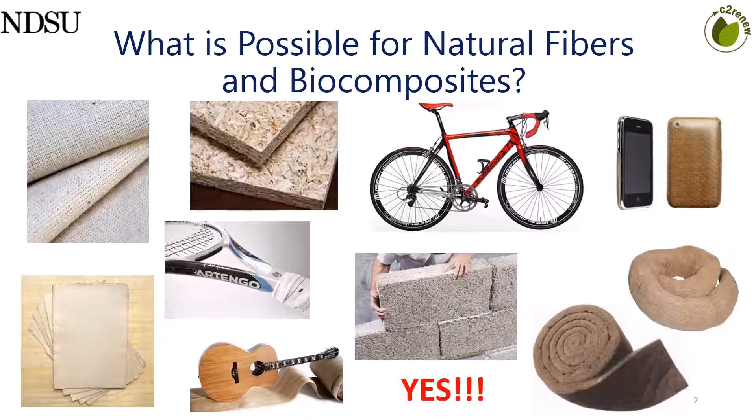Similarly, people ask me all the time, what type of plastics can we make from these materials? And there's a wide variety of different plastics that can be made, either forming epoxy or acrylic type thermosetting resins from the vegetable oils. You can break down the cellulose into simple sugars and build them back up as, say, cellulose acetate type thermoplastics or polylactic acid type thermoplastics. There's a wide variety of ways you can utilize this plant. And so my answer is always yes. There's a ton of different plastics that can be made from these materials.

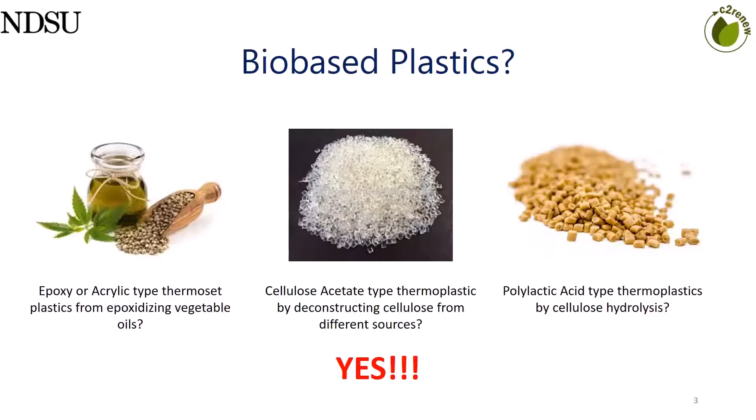But at the end of the day, we have to decide what is truly sustainable, what is going to have relatively low environmental impact, what is going to be beneficial economically, what is going to be beneficial to the people handling these materials in these processing and manufacturing facilities. Only when you start to assess all of those aspects are we going to be able to determine what is sustainable and what is not moving forward.

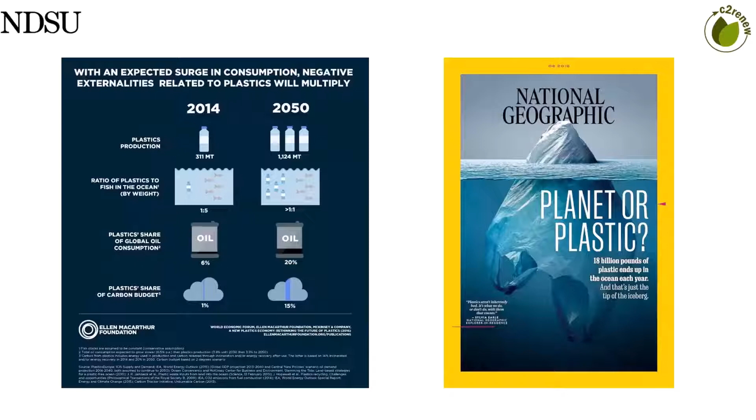And I'm sure you're all very familiar with concerns about the amount of plastic that has entered our waterways. There was an Ellen MacArthur Foundation study done a few years ago to predict what volume of plastic might be in the ocean in coming years. Also, we've seen estimates of running out of landfill space.

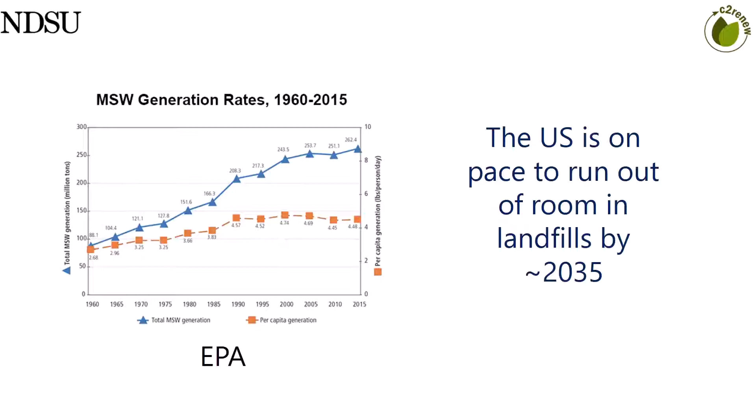Estimates are the U.S. will be on pace to run out of room in landfills by 2035, which is not too far off in the horizon. And so when we look at how to develop materials and what is truly sustainable, our group really focuses on the three capitals: natural capital, what our planet offers us; manufactured and financial capital, the prosperity; and human and social capital, our people. And one thought is where these three intersect is where you can truly find some sustainable materials, sustainable technology,

something that can have very low impact on the environment, yet be financially sound and make money and sustain people in terms of their work-life balance, in their prosperity and their development as humans. That intersection is where we find sustainable material development.

And we do a lot of the analysis of any material that we develop. We look at both the LCA, life cycle assessment, as well as the techno-economic analysis to help determine, are we meeting this sustainability target right in the middle there, or are we off base? And so these are some of the tools that we've been utilizing with colleagues to try and determine when we're developing new materials if we're meeting this mark.

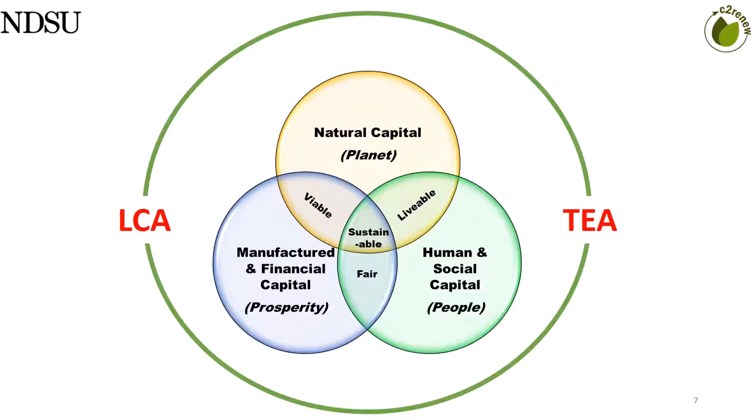So our research approach at North Dakota State University over the past decade really has been focused on working as a land-grant university, working with our agronomists, our plant breeders, and looking at what's available out in the fields. What can we break down into, say, proteins or starches, stripping the natural fibers from the bark of a stalk, utilizing the woody core. Are there alternative uses for the vegetable oil that one can convert into different plastics and use to manufacture a wide variety of composites that ultimately will hopefully end up in commercial applications, whether it's farm equipment, automotive, consumer-facing products, the list goes on and on.

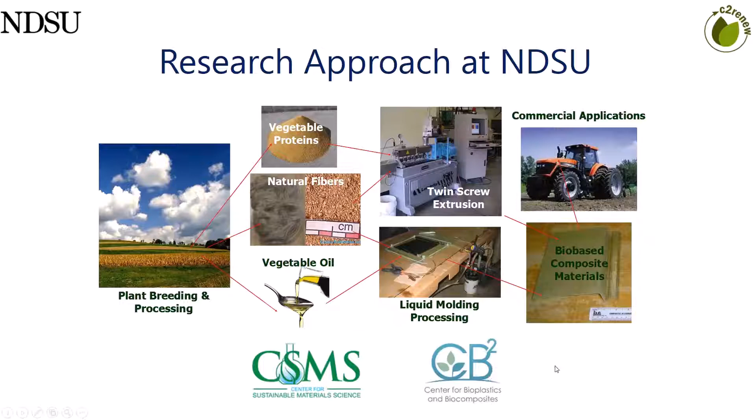And for several years, we had our Sustainable Materials Science Center that was funded through NSF EPSCoR for 6 years. And we're just coming off of that. And really now, since we've been able to develop several different materials utilizing this approach, we're starting to look at how we can then implement those through industrial applications by working through CB2, which this webinar is part of.

I kind of break the development of different biocomposite materials down into 3 project areas that I've been involved with over the years. Short natural fiber, and this can be thought of as mainly fillers in different types of plastics, from say hemp, flax, sunflower hull, oat hull. We've analyzed and assessed many different types of these agricultural byproducts as fillers or short fiber reinforcement.

Then there's the category of long natural fiber, where you start to utilize fibers with aspect ratios of greater than 2,000, that length to diameter. And this would be also your flax, but the fiber comes from the outer bark of your stalk. Similarly with hemp, and as I mentioned earlier, kenaf and jute are other examples of bast fibers. But there are also long fibers available in certain grasses, giant miscanthus, bluestem from around here, that one can utilize as reinforcements.

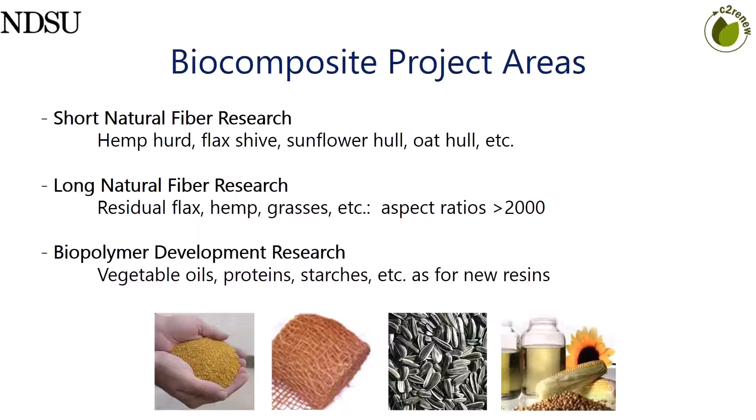And then I work very closely with colleagues on biopolymer development, from both NDSU as well as some of the other participating universities in CB2, such as Iowa State, University of Georgia, where they're developing polymers from vegetable oils, proteins, starches, all in the same vein of trying to develop more environmentally friendly or more sustainable types of polymeric resins for coatings, for composites, for a wide variety of different applications.

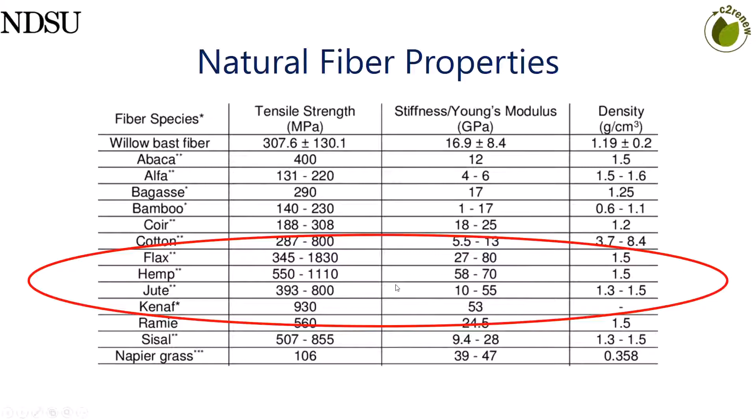However, one of the most critical areas is the breakdown of the bast plant. How do you take the straw that's coming off the field after the seeds have been harvested and appropriately break it down for different applications? And that process of separating the fiber from the woody core is known as decortication. And there are many different ways to decorticate natural fibers from that woody core in the stalk.

Some of them a little more aggressive or harsh to the fiber in terms of breaking it down, maybe creating some kinks, maybe shortening the length. Whereas other types of decortication processes really handle the stalk in a more gentle way so that they can extract the fibers and allow them to remain intact.

And there's a lot of different, especially in the US, there's a lot of different groups that are looking at putting decortication facilities up, especially now with hemp being able to grow in the US, and look at how efficiencies can be gained when you choose certain types of decortication processes. But again, much of that decision is made on where is the application. Is it in textiles or is it in erosion control blankets? Because in my opinion, you're going to utilize a very different decortication process.

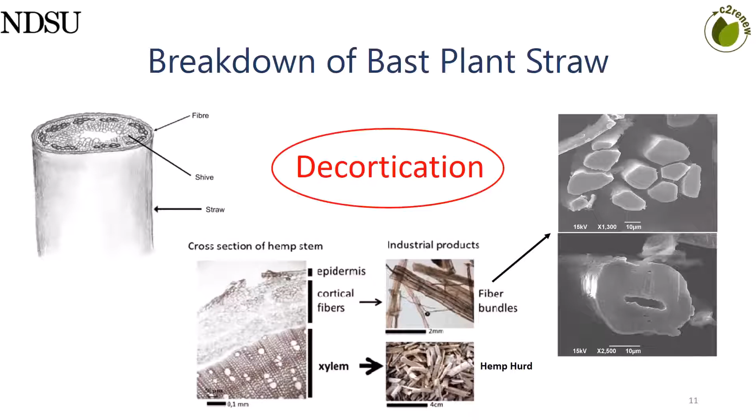And the constituents of bast fibers do change based on variety and growing conditions. And so what I'm finding more and more useful is when people report data on different types of fiber that have been harvested and tested. It's much more useful if we understand things like if any lignin or cellulose content, pectin, hemicellulose content has been measured to report those, along with the method of retting and some sort of, could be, more of a visual assessment or organoleptic type of assessment of the quality of that fiber.

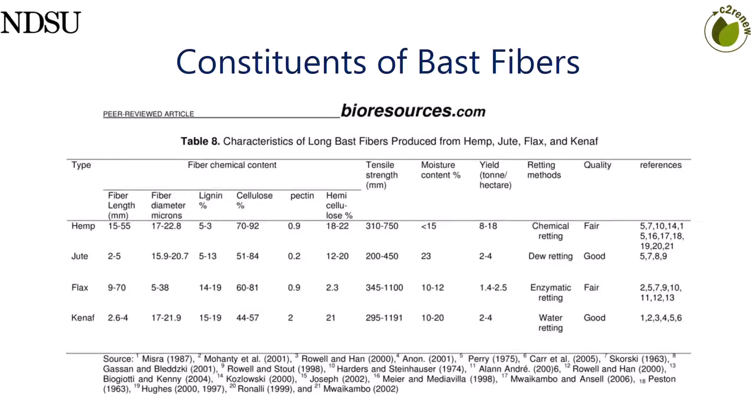And just to give some perspective and background information on a particular fiber, because all of these pieces of information become relevant and become important when you start thinking about where can I use this fiber? Is it of a higher quality that I can potentially utilize it in an automotive application? Or is it of a quality where maybe I need to think about it in a geomat type of architecture or, like I mentioned earlier, erosion control type of blanket where the quality of the fiber doesn't need to be as high in those applications.

But by and large, the role of the natural fiber in biocomposites, there's several advantages, being lighter weight, lower dermal abrasion. If you've ever handled natural fiber versus fiberglass, there's a stark contrast there, and that comes from health and safety of the worker, the handler in the manufacturing facility.

Reduction in energy consumption, the types of high energy and melt temperatures that are required to make glass fiber versus natural fiber. Although there is a good argument of the fuel that's used in the tractor and the equipment that's utilized out in the field, and you only realize that when you go through a full life cycle analysis or techno-economic analysis to identify those inputs, such as the fuel that the tractors use as they're harvesting the fiber versus melting down soda lime to make fiberglass.

Better vibration dampening capabilities, better insulation and sound absorption properties, and I'll get to that in a second. Better degradation when service life is exhausted. However, there is some concern, well, if these materials degrade so much more readily than, say, fiberglass, do we have to be concerned when we try and make a fender on our automobile out of them? And there's ways to protect that, and that really hinges on the matrix or the type of plastic that you use to encompass those fibers to protect them.

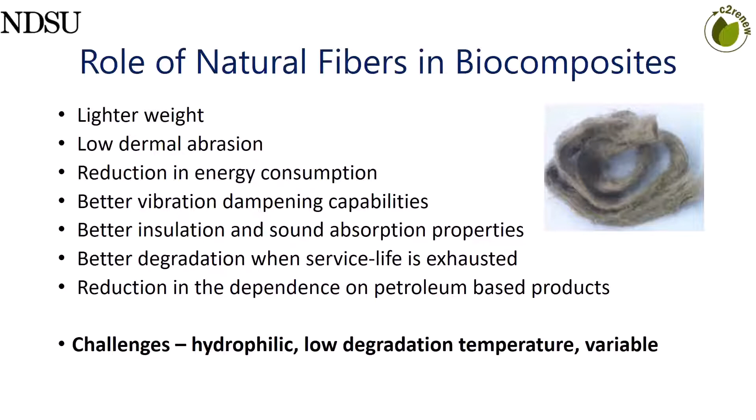Maximum temperatures that they can be exposed to for long periods of time is around 180 degrees centigrade before they start breaking down. And their properties are very variable from the standpoint of, again, different types of varieties, the climate in which they're grown, the soil conditions in which they're grown, and how long they're grown before they're harvested all affect their properties and give that variability in performance.

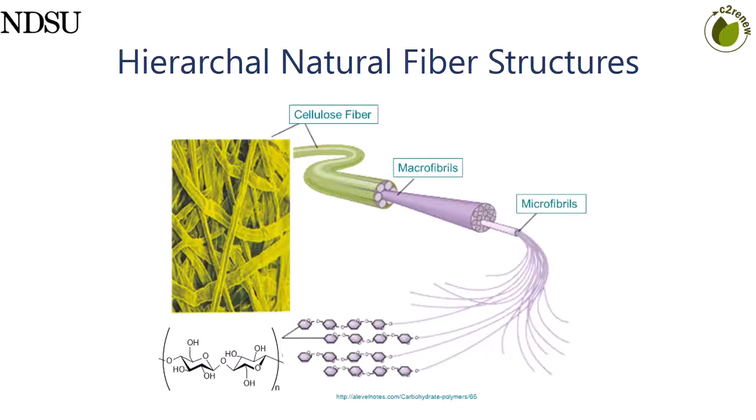A lot of the dampening and insulative properties from natural fibers stems from their hierarchical structure. They're very complex structured fibers with the cellulose as the backbone, and your pectins and your lignins kind of adhering them all together in this multi-step fashion as illustrated here. The strength and the stiffness of your fiber really comes from that secondary wall and how the crystalline cellulose is oriented in that secondary wall.

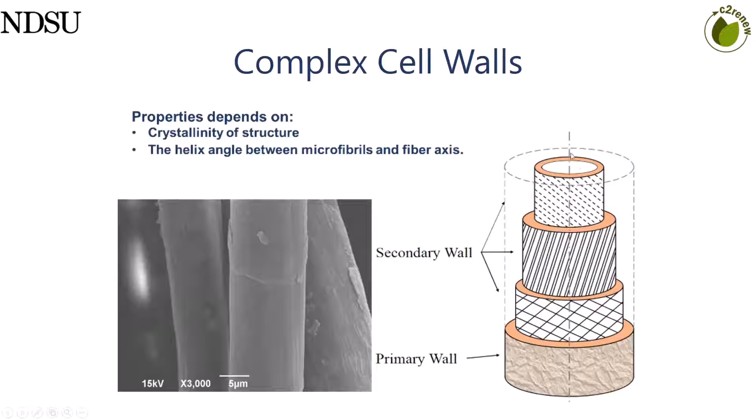And what we found and others have studied as well is that angle in which the cellulose grows during the growth period really determines that strength. If you've got a greater angle off axis to the fiber, you have a much lower modulus or lower stiffness fiber, as opposed to having the cellulose constituents growing along the axis of the fiber as it's being grown.

I talked a little bit already about the optimal time in which you should harvest the fiber. Depending upon the variety, the growing conditions and the time of year, sometimes you can have natural fibers that have a very closed, uniform cross-section, whereas later on in the growth process, they develop what's known as a center lumen. That lumen can be a source of weakness in the fiber, especially if it gets too big, and you cannot penetrate the lumen with resin unless you use a high vacuum to fully infiltrate the center lumen and fully wet it out.

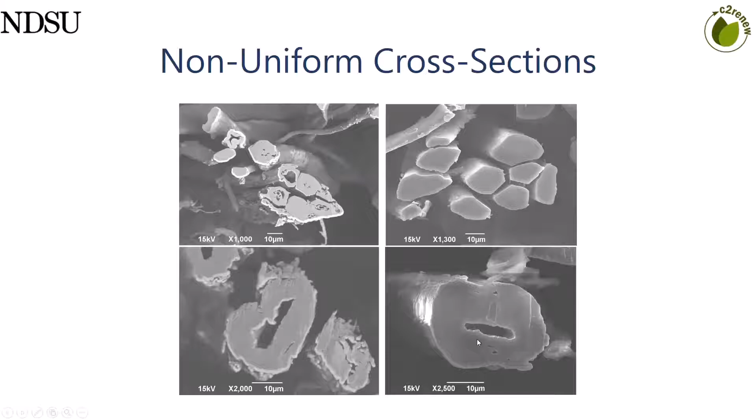And so again, even when you harvest the fibers is important if you're trying to grow them for certain applications, whether it's automotive or aerospace grade composites versus something like an erosion blanket or a geotextile where the performance requirements might not be as high.

In my group, we've tried several different fiber surface treatments, both physical and chemical. Physical treatments that we've assessed, simple mechanical calendering, rolling, swaging, combing for long periods of time, can have some decent effect on separating the fibers and cleaning them of those waxes and pectins. However, they cause some breakdown of the length of the fiber, so it's again a trade-off.

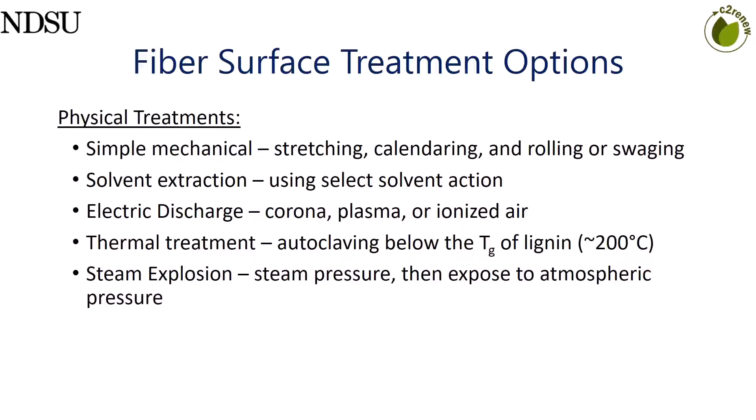Solvent extraction. We've tried electric discharge and plasma treatments, which have some effect. They're not long lasting, but they can excite that surface so that you can apply your resin or coating and have a better inherent bond between your resin and your fiber. Some thermal treatments basically decompose some of those lower molecular weight natural polymers, the pectins and waxes, so we've tried some autoclave treatments. Steam explosion is another route.

Chemical treatments: there are various alkaline treatments, coupling agents such as silanes that are used for synthetic fibers, carbon fibers, glass fibers, bleaching, enzyme, peroxide, the list goes on and on. But what I want to emphasize is that in most of our work, many of these treatments only give you a gain in strength or modulus of 10, maybe 15% if you're lucky.

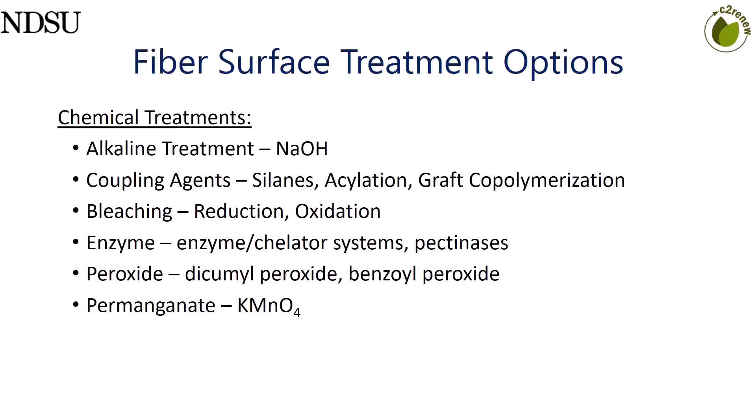So it comes down to that balance of utilizing some of these expensive chemicals and what to do with the waste for the minimal gain you might get in properties or performance. Is that sustainable? Those are the types of questions that need to be asked and answered through your life cycle analysis.

In our study of natural fiber stress-strain behavior, we've tested thousands of single fibers, and one type of behavior that a majority of the fibers from flax and hemp show is this triphasic stress-strain behavior. We have an initial linear elastic behavior followed by some non-linear viscous flow. Then after a bit, we get a strain hardening effect where the alignment of those cellulose chains takes place until the ultimate rupture of that fiber.

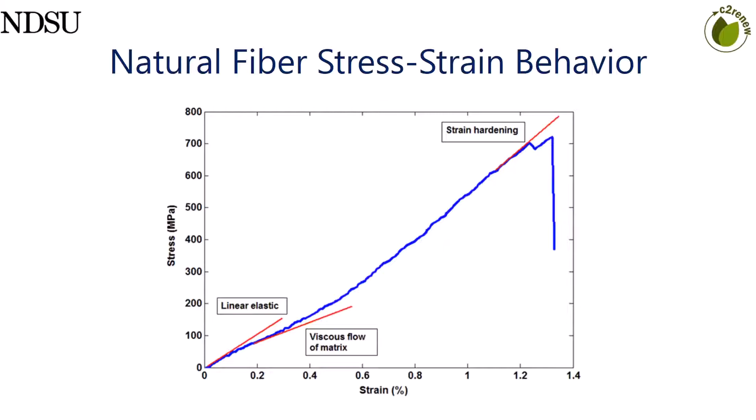This might not be important for a lot of applications, but in terms of how to properly model these fibers so they can be used in, say, a finite element scenario for design of different structures, this type of information does become important, and that's why we're out to study it and determine its behavior.

We've also found that due to the variability of these natural fibers, especially when we put them into composites, a statistical modeling approach such as Weibull is somewhat effective. Much like one can assess the strength and performance of ceramics that have a lot of porosity and variability, we've used that same approach with natural fibers, with fairly good success in predicting performance given the variability of the fiber structure itself.

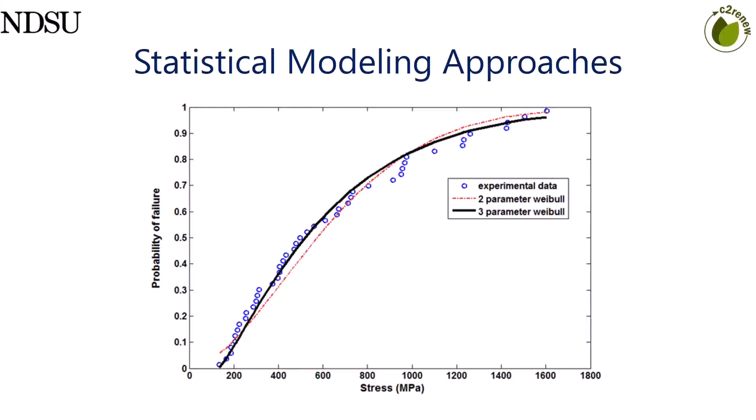Another challenge that we've overcome and studied quite a bit is once you form that composite, once you encompass those natural fibers in a resin or a matrix, how do you assess, say, the fiber orientation or voids present, or even fiber volume fraction for that matter?

The challenge is with a lot of your synthetic composites, you can dissolve the matrix afterwards to assess the fiber architecture and the fiber volume fraction, or you can perform burn-offs in a controlled environment in order to assess that fiber volume fraction. But with natural fibers, you can't, because then you would degrade the entire material. So we've turned to

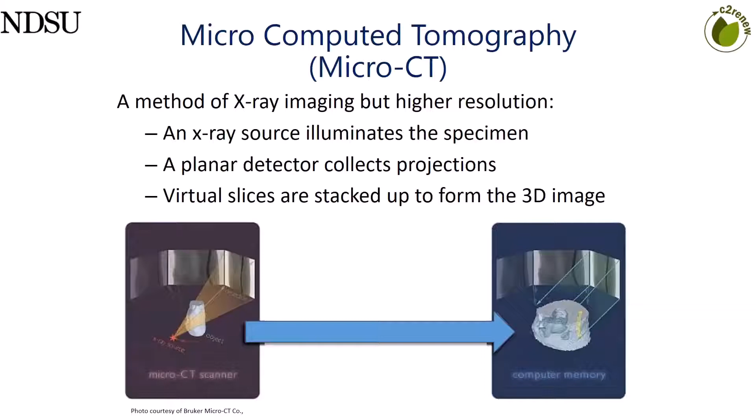micro CT, where we're able to X-ray the structure, and we've seen some pretty decent results where we can assess voids, fiber orientation, fiber volume fraction. This particular specimen was tested in flexure, and we saw how some shear failure occurred through the thickness of the composite, and we can do a nice assessment of the material without degrading it through thermal or chemical means. We can assess the inside of that composite relatively easily with micro CT.

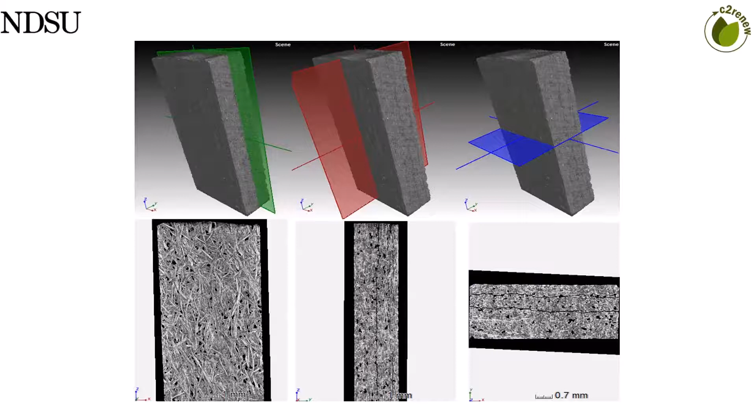Another aspect we've looked at as a group is the durability, the long-term performance of these composites, and we've used different fatigue testing and modeling approaches to determine things like high cycle fatigue strength of these different types of composites. We can do so by testing at different temperatures and at different frequencies. And we've published quite a bit of work on that long-term behavior.

What I can say in general is these biocomposites that we've developed have that break-in period that you see with any type of advanced composite structure. You look at fiberglass reinforced softball bats, for instance. There's this sweet spot where they have this break-in period where you have to damage the structure to a certain degree, and we're talking very much on the micro level, you have to induce some damage before you get the ultimate performance of that material.

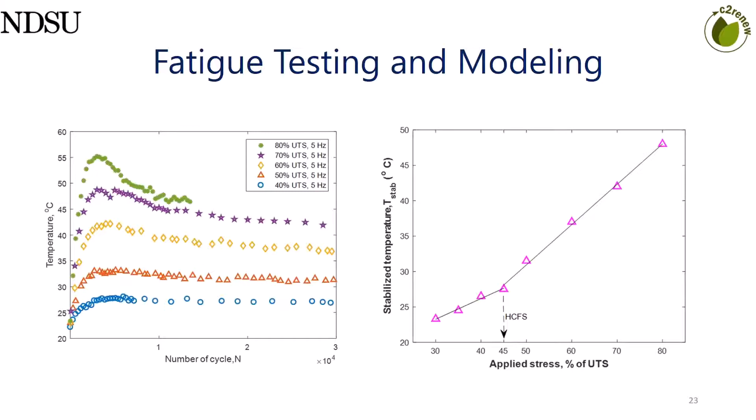And then after a long period of time or number of cycles that bat has performed, the properties or the performance start to tail off due to the repeated impact on that particular structure. We see several similarities with natural fiber composites as well.

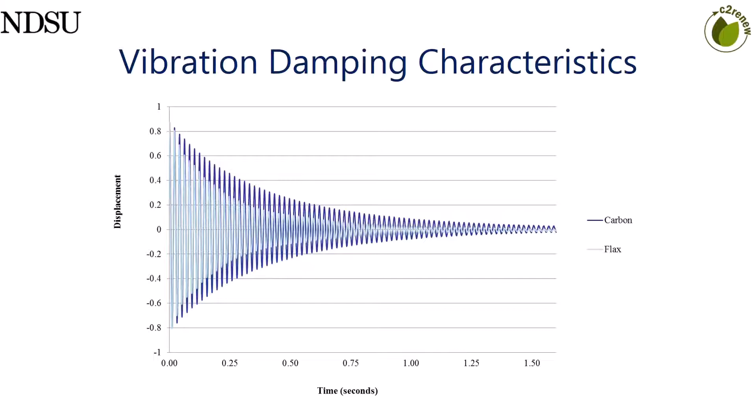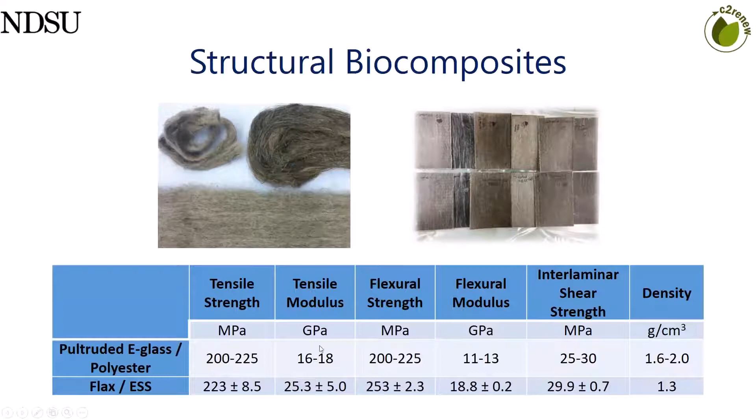And we had properties that were on par, if not superior, to that of the pultruded e-glass and polyester that is petrochemical based, in tensile properties, flexural properties, and interlaminar shear strength, so the resistance to failure between plies of those fibers. And when you compare the density of the two composites, these gains are even more attractive on a specific basis, because your specific tensile strength or specific modulus is going to be even higher than your traditional material.

I talked a little bit about hybridization and the opportunity to gain the best of both worlds. You can take a natural fiber such as flax or hemp and combine it with carbon fiber, which has very high strength and high stiffness, and you gain the best of both worlds in terms of strength, stiffness, as well as reduction of your standard deviation of properties. That'll come out of the carbon fiber.

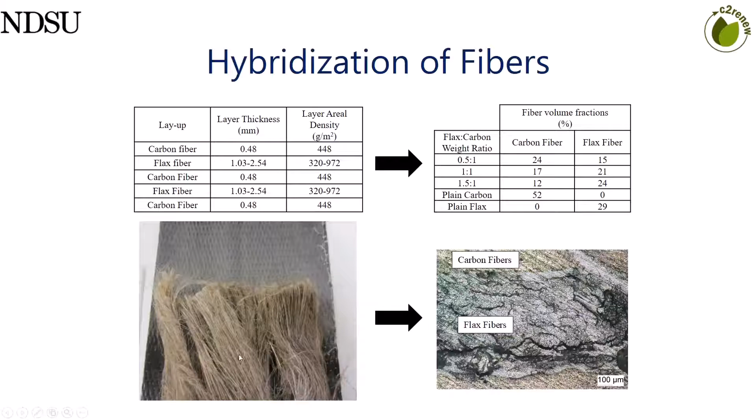But what you gain out of the natural fiber are things like the vibration dampening, the higher specific strength and specific modulus, as well as the sustainability in terms of utilizing a natural material and less of the synthetically produced reinforcement.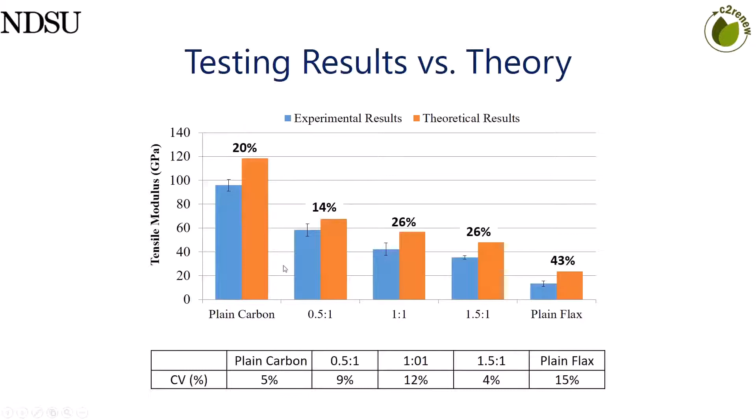And so we've done a lot of studies on hybridizing at different ratios, and then this particular graph is on tensile modulus, looking at how those properties change going from an all carbon fiber structure to an all flax structure, and looking at basically a linear, close to linear degradation in modulus as you put more flax fiber than carbon fiber into your composite.

And that's led me and my students to develop many different types of technology demonstrators. They've been involved with making longboards, bicycles, bicycle helmets, paddle boards, putters, as well as roofing tiles out of some of these materials. Now that we have a good idea of their properties and performance, actually putting them into applications, testing them, and seeing truly what they're capable of.

And that's the exciting part, and why my answer of what the outlook for these materials is, I would say it's limitless. But for what is truly going to be sustainable moving forward, we still have a lot of homework to do. We still have a lot of assessment to do and to understand. And I'll talk about some of those challenges at the end here.

With that, using my faculty research hat, I'll bring that discussion to a close, and I'll briefly talk about what I see on the commercial sector with my company, C2 Renew. When we started C2 Renew, our mission really was to connect companies in North Dakota, as well as Minnesota, South Dakota, our surrounding regions, and partners up in Canada, to help develop ag tech, because our primary economic driver in the state of North Dakota is agriculture.

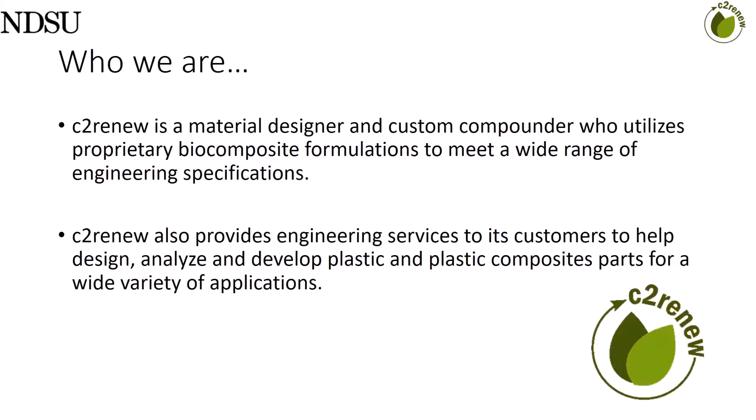We started as a company back in 2012, 2013, going after opportunities that are under the hood but high volume, so belt guards for skid steers or tractors, handles for tractors, components that might go in inkjet cartridges. But what we quickly learned is that there wasn't a huge cost savings for these companies at that large volume. So we went through the rigor of being spec'd out on engineering drawings and having in-field testing and certification to be used in these applications, but the interest wasn't quite there from an economic standpoint.

And that's when we pivoted and focused on materials that we could create a message with, consumer-facing products where we wanted to help that company make the product scream green. That's what we always talk about: you see the biomass, you see that this has more to it than just a traditional plastic. And that's where we've focused most of our attention since the 2014, 2015 time period.

And so we've gotten into a lot of different applications, consumer-facing products, packaging, whether it's for air fresheners or rodent repellents. We work very closely with Bogo Brush to develop 4 different types of biocomposites for their toothbrush line. We've worked with companies like Dragon Chewer on packaging for CBD oil type products. We've also made things like golf tees with Hemp Tees Golf.

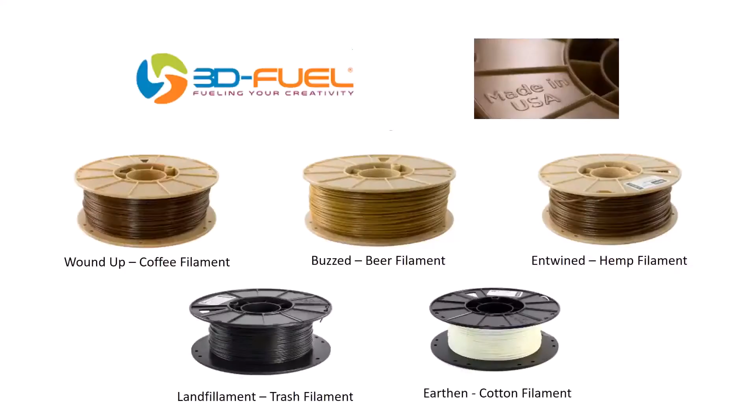Another area that we've had good success with is 3D printer filament, with a company that we actually share the same building with, 3D Fuel, who manufactures a wide range of FDM type materials for 3D printing. One is based off of coffee, and that one we've called Wound Up.

One that's based off of residuals from the malting process to make beer, and that one's called Buzzed. With hemp, we've created Entwined. With Earthen, we've used waste cotton. And with Landfillament, this is a very interesting one. We've actually used thermally converted garbage and used that as a filler in PLA to create Landfillament, which has had quite a bit of success for 3D printing.

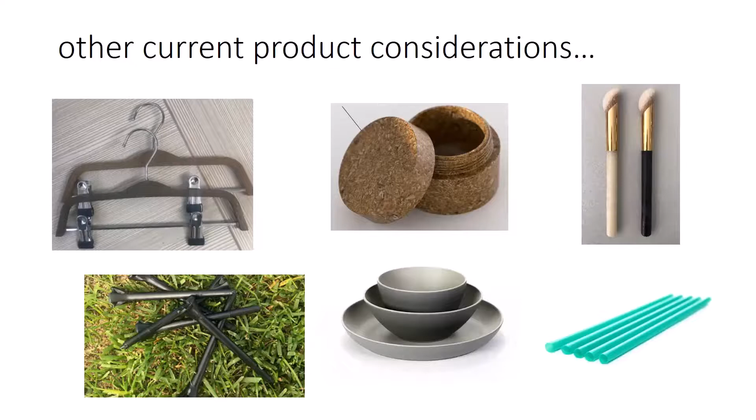Other current product considerations: we're looking a lot at home goods such as bowls, plates, utensils, the cosmetic industry, both in containers as well as cosmetic brushes. We're working with a couple different tee manufacturers as well, different avenues there. One particular company approached us to make tees out of coffee, and so we've got bean tees, as they refer to their golf tees. Coat hangers, clothes hangers, things of that nature as well.

But at the end of the day, and I hope to end with some time for Q&A here, we still have some challenges ahead of us. And a lot of this has to do with, again, determining whether these materials that are being created and put out in the wild, as we always say, are truly sustainable. Are they going to be, in the long run, beneficial, both from that capital standpoint, human standpoint, and planet standpoint, in order to sustain?

And some of the challenges that we still have to overcome are a lack in manipulating the surface characteristics so that we can properly bond fibers to different types of resins. We know we have a lack in higher temperature performance of natural fibers. So what can we do there to help and improve that? We also have a lack of standards for natural fibers and their composites to properly assess and grade.

And in particular, if we look at the woody core of that stalk, where the hurd and the shive come from, things like measuring purity, color, those types of properties are very important for that final compound. And so I'm on several different ASTM committees to help develop standards for natural fibers. I've sat on ASTM D13.17 for bast plants and fibers for several years and helped to develop some standards. And I now also sit on D37.07 for industrial hemp to do very similar standard development, especially when it comes to the fiber tensile properties.

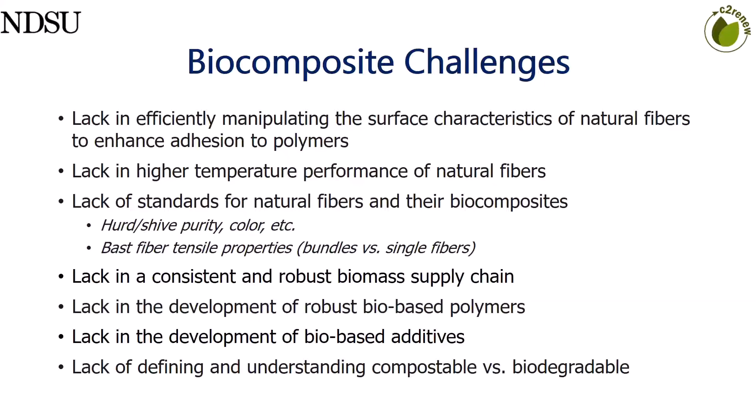Much more emphasis and clarity needs to be put on proper labeling of packages and certain types of materials, because I can have a compostable plastic as a thin film, but the minute that I put it in a thick section product, I can no longer call that a general compostable material, maybe an industrial compostable material, but because of the wall thickness, that article would need to be shredded first before it could meet those compostability standards, such as ASTM D6400 and so forth. So those are kind of the challenges.

Some of the opportunities I see is continued work on hybridization for different structural applications. We can combine bast, hemp, flax with carbon glass for some high performance applications. I also see a huge opportunity for foams and foam composites, specifically to compete against isocyanate. So if you can create a foam that is non-isocyanate reacted, then you have a much better environmentally friendly type of foam product that goes in just about everywhere, whether you're talking about insulative walls, in the cushions of the seats you sit on. There's a ton of opportunities there.

Also, from a lot of the decortication processes, there's shorter fibers that are created that still have a lot of opportunity for strength in a composite, and we refer to those as long fiber thermoplastic, or LFT, and those fibers are in the range from anywhere from 1 to 2 inches, where we could do some extrusion compression molding of articles that could have very high performance in comparison to, say, a fiberglass LFT.

And then finally, additive manufacturing. We've seen such an explosion in utilization of additive manufacturing. I see this as an opportunity to grow for biocomposites as well as synthetics. And so a lot of opportunities there, as well as challenges.